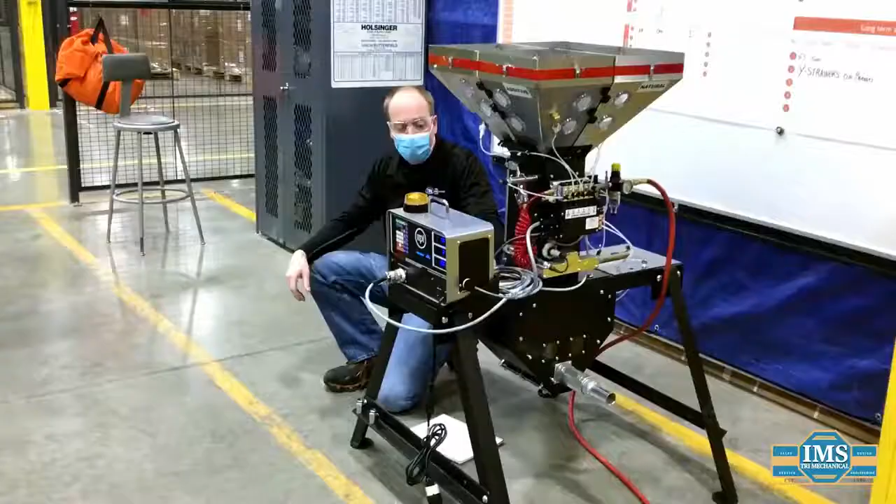Hi, my name's Rod J.R. Duff, and I am the Executive Director for Business Development for the IMS Tri-Mechanical Companies. I started as an inside sales rep in 1989 with the ambition to become a full-service plastics provider. Our company has a full design and engineering department, a full aftermarket services team, and a very energetic team of inside and outside sales professionals.

I am proud to say that each of these distinct and separate departments complement each other and are managed by some of the best individuals I have ever met. Hi, my name is Rob Williams, and I am one of the managers here at IMS Tri-Mechanical Companies. Hello, my name is Lawrence Gooding, Inside Sales Specialist for IMS Tri-Mechanical, with over 10 years of experience in the

plastics extrusion industry. My name's Barbara Rodardi, and I'm an account manager with IMS Tri-Mechanical. Hi, I'm Chuck Bueller, and I'm a regional sales manager for IMS Tri-Mechanical Companies. Hi, my name is Bob McHouston, and I'm the field and operations manager for IMS Tri-Mechanical. Today, I'm here to talk about Bausano extrusion systems and the upcoming Bausano Open Day event.

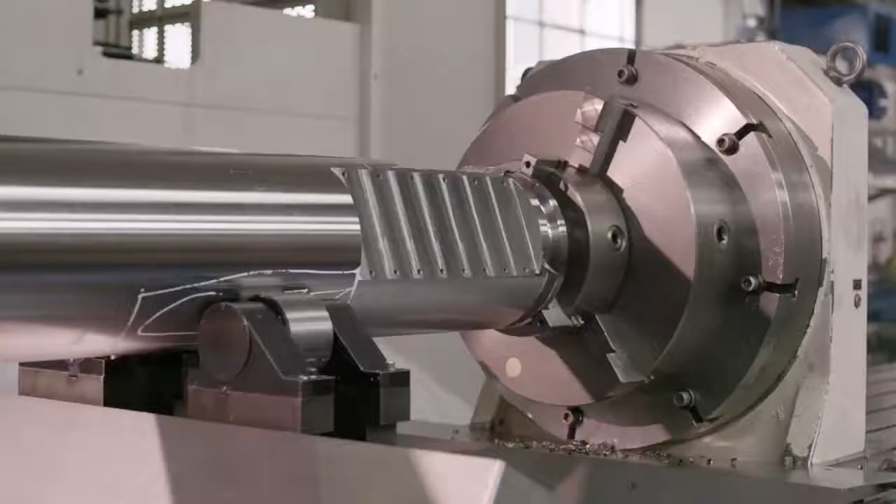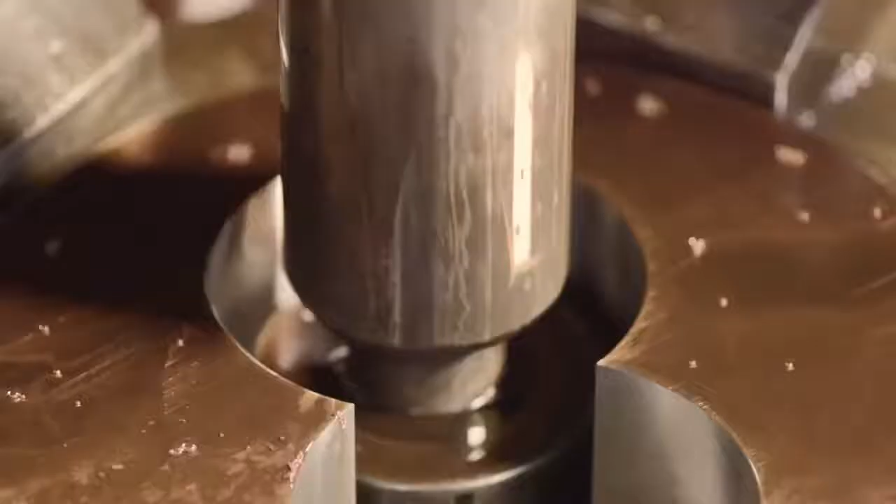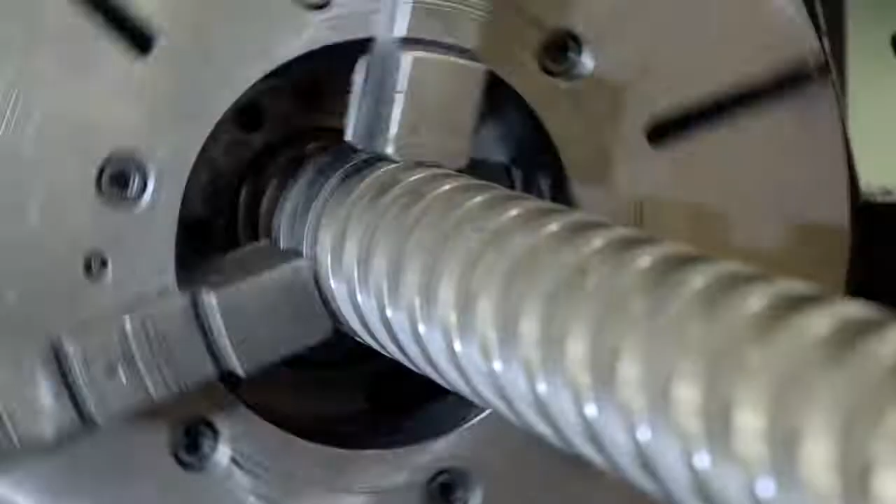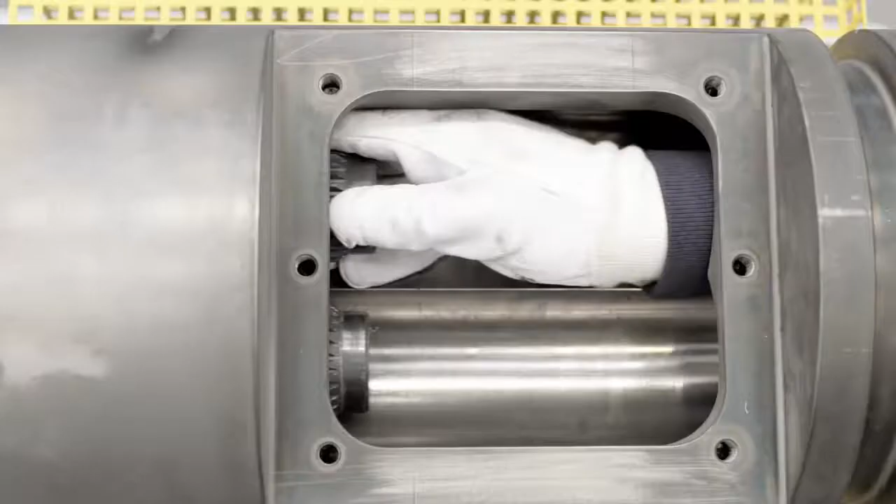Bausano is synonymous with innovation. This is why IMS Tri-Mechanical partners with them. We offer our customers the opportunity of transforming their companies into smart factories where productivity increases and working conditions improve. Unlike other extruder manufacturers, Bausano does everything in-house. I mean everything, from component drawing and manufacturing to line assembly. Every step is managed internally by their highly skilled staff.

Hi, we're here at one of the leading PVC compounders, certainly in North America. We just want to share their thoughts on Bausano extrusion systems. Hi, my name is Nick Lynch. I'm the president and CEO of Roscom Incorporated. So in the mid to late 80s, Roscom was looking for a twin screw manufacturer so we could buy equipment from. And we went to Italy and we met with Bausano Group.

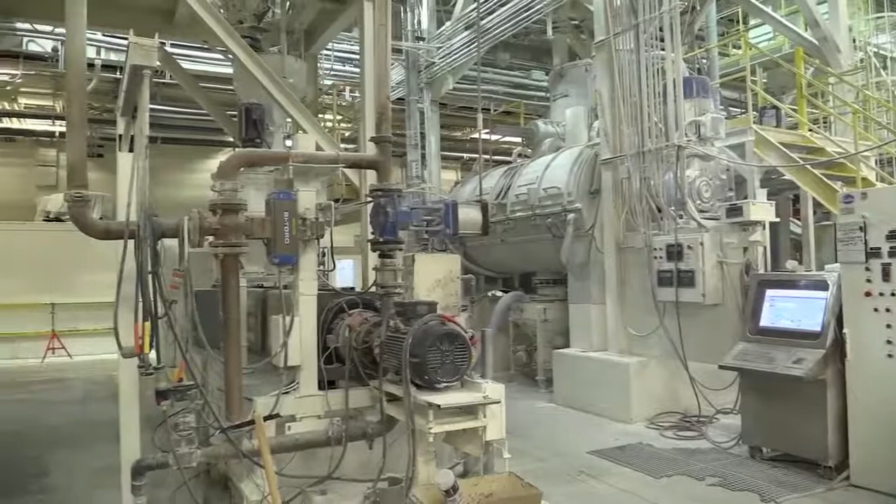Since then, we've produced over 1 billion pounds of material utilizing the Bausano extruders here at the Roscom facility. Our goal was to get to a machine that would run 1,500 pounds an hour. Bausano, with their 154 machine, has proven that we run 3,000 pounds an hour. So before we could actually buy a piece of equipment, we had to confirm that the material itself was going to work in our customers' locations.

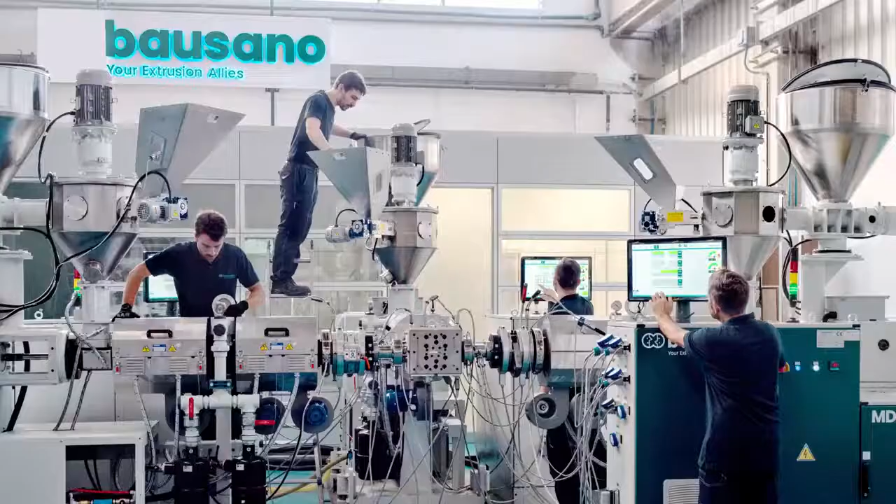Bausano had a testing laboratory, a full production testing laboratory. So they allowed us to ship material. We shipped it in a dry blend form, 20,000 pounds of 4 different materials. We wanted to verify that the material coming off of those production lines would meet the quality of our customers' products. And they did.

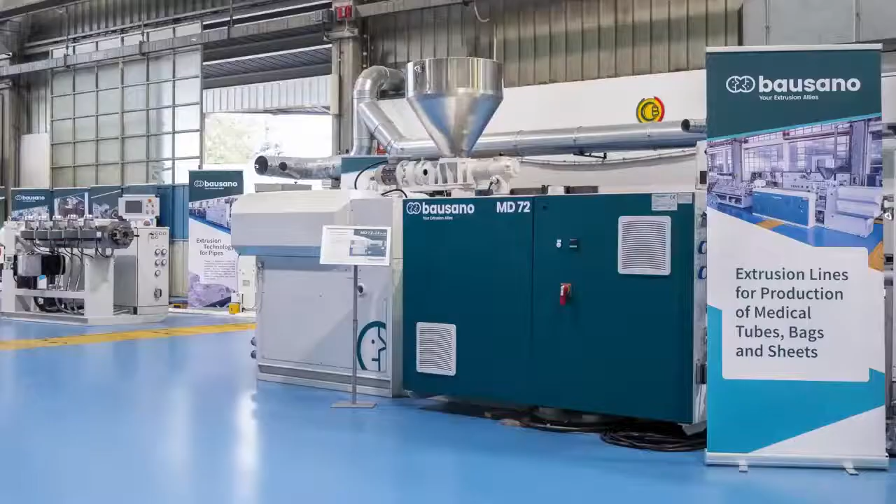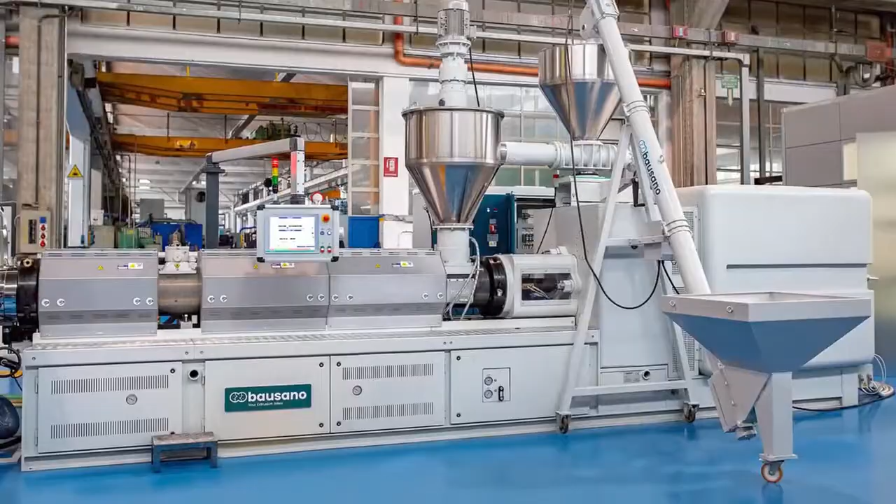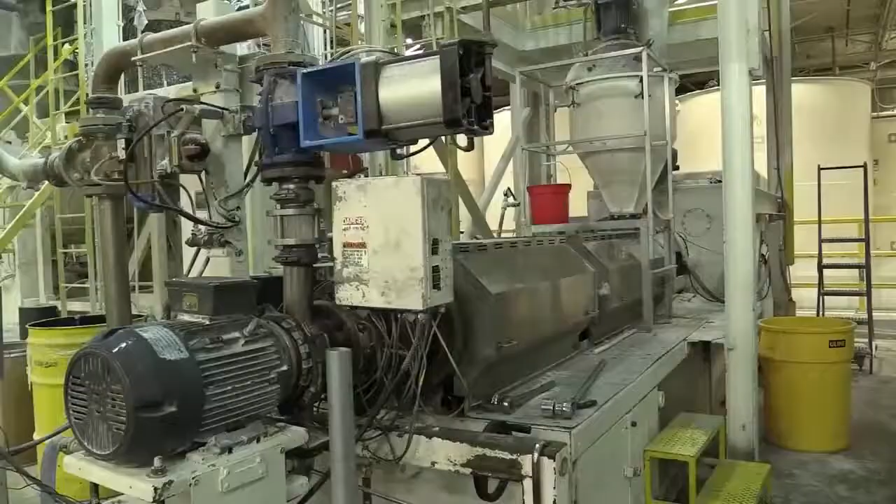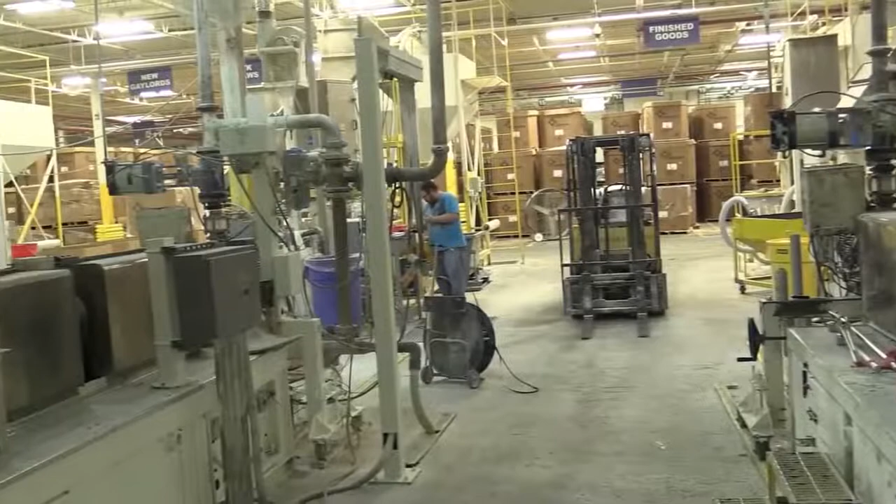I arrived at Roscom in 1996, and pretty much all but one of our 5 Bausano extruders were already in place here at that time. So we've been running them pretty steady since the day before I walked in the door. I actually love the Bausano. I mean, back in, I'm going to say 2001, I did the install of that line. That was the 5th one that we added. We beat the hell out of them. They're bulls. They run. We never really have an issue with them, which is great.

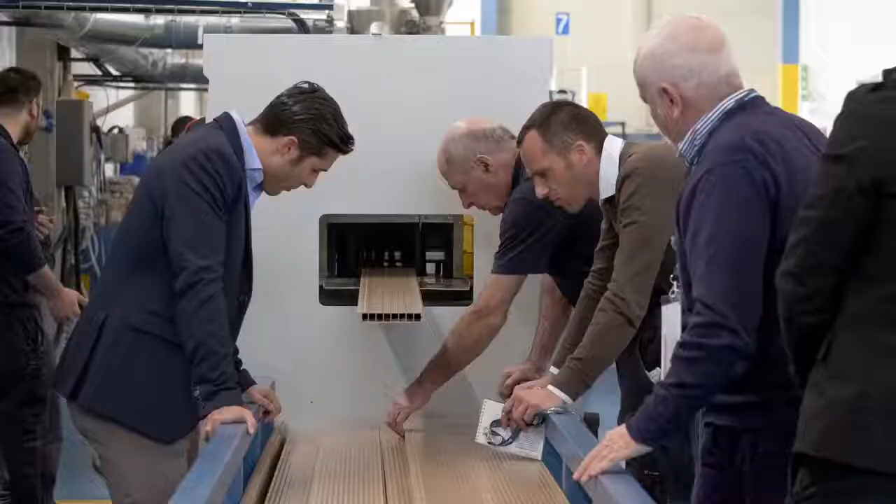As a manufacturer who runs 24 hours, 7 days a week, and we're always in somewhat of a sold-out position, the importance of having spare parts. Bausano, the fact that they manufacture these equipment every single day, so if we needed a transmission or we needed a gearbox, some companies here in the United States, you wait 6 to 9 months before they'll even have a product to ship you.

Bausano has been there for us right from the beginning. They have that type of inventory. Bausano's spare parts and everything, we've never really had a problem. We always go at them with an email and they're back to us in less than 24 hours worth of response. They've never dropped the ball on us at all. They've always been right there with us to work through anything, any questions.

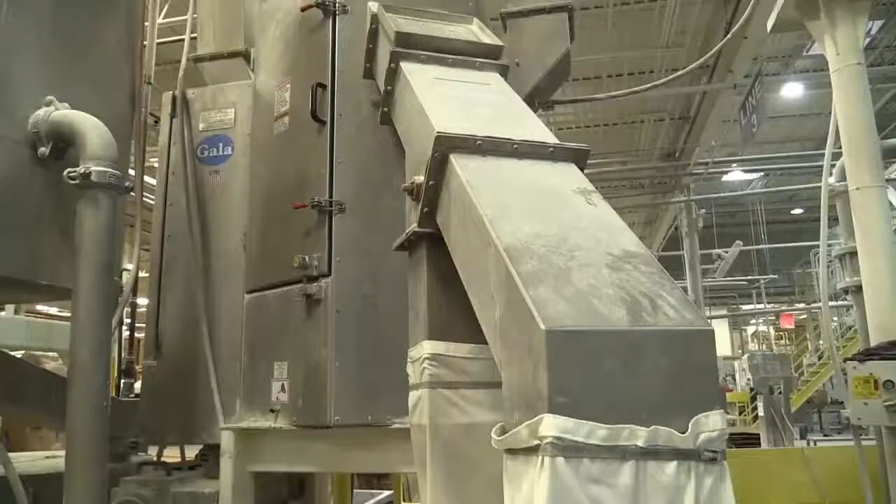Bausano itself, you can adapt various other equipment regardless of the manufacturers that we select that we want to work with. It ties in with the Bausano lines. When I talked about how clean and wonderful that plant was, and you look at all the orders and all the manufacturing, you knew Bausano was here to stay for the long run. And it's proven its point here 40 years later. They're a strong, wonderful company. They've done a great job for us.

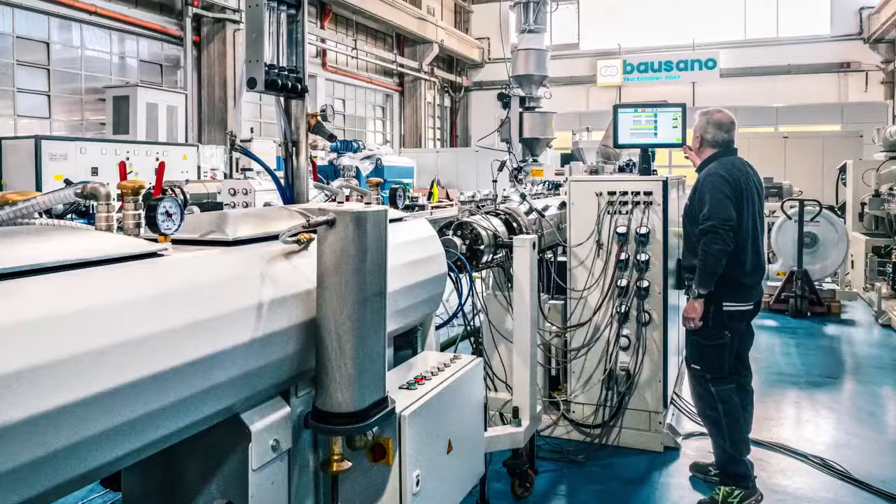I don't know of any other company that I personally have worked with, and I've worked with a lot of companies, I've designed a lot of plants, where the Bausano people and the equipment are state of the art. If I put another production line in from Roscom, I guarantee you it's a Bausano line.

You can go visit any manufacturer in the world, go visit them, go to the Bausano facility itself, and you make your own choices. And I guarantee you'll come back with the same feeling that I did, that you're working with a first-class world manufacturer of equipment. And that's, for me personally, seeing it and seeing other companies, you'll never regret it. It's worth the trip.

I'm not getting paid for this at all. I would never want any money. Bausano is a fantastic company, and I just wanted to spread that to anyone else that wants to listen. And I guarantee you, go visit everyone else, see Bausano, and you'll have them for life, just like Roscom.

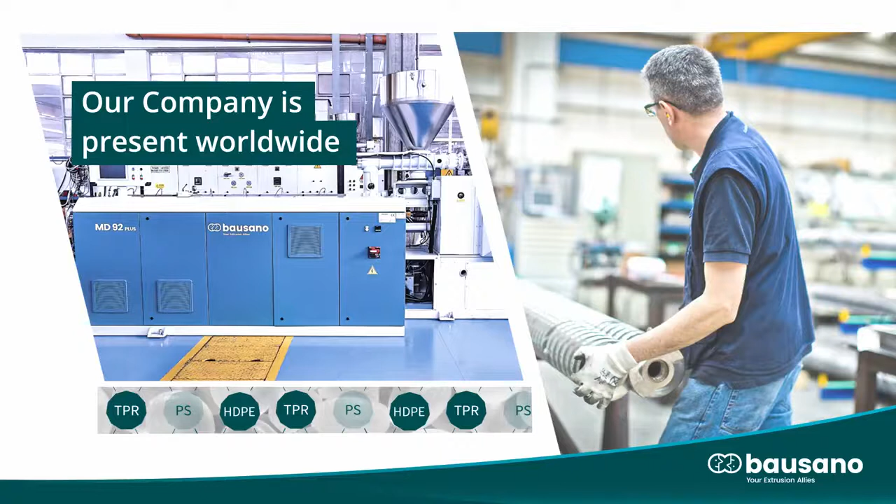So guys, today's event represents for us an important opportunity to provide a preview of the initiatives that we are implementing to effectively respond to the need of North American market. And let me tell you something. A structured training program for specialized technicians is underway at the Houston and Oswego partnerships aimed at guaranteeing qualified and prompt assistance centered around flexibility.

But not only. In autumn, at the showrooms of our partners, a twin screw extrusion line will be installed to be seen and tested by any interested customer.

Now I will hand over to Gianmarco to go into the details of the line that you will see in operations today. My name is Gianmarco Palladino, and as previously mentioned by Giorgio, I'm in charge of the southern part of US, from California up to Florida.

Today I will talk about our range of products. The core product is the twin screw counter-rotating extruder used for many different kinds of applications. For the production of pelletizing and repelletizing line for different material, but mostly PVC. For the production of pipes, such as conduit, pressure or sewer pipes, up to the medical and agricultural hoses.

In fact, over the past year, we have developed and improved a new generation of die head technology in order to provide a high-speed line where we can reach interesting output. Then, of course, we provide an extrusion line for the production of profile, such as windows, flooring, and ceiling, even those made in WPC, so wooden plastic composite.

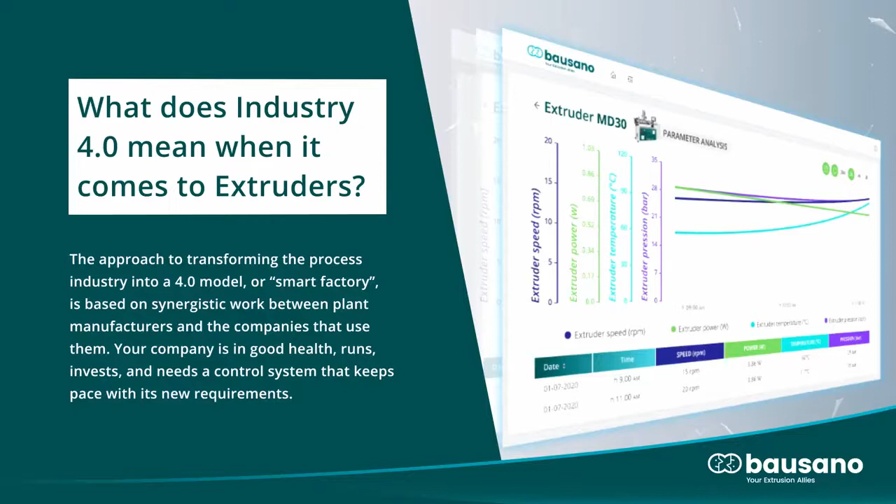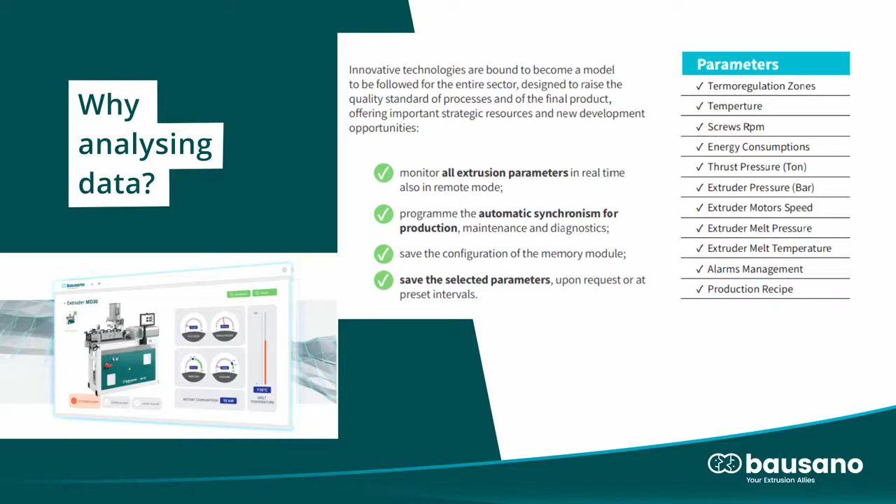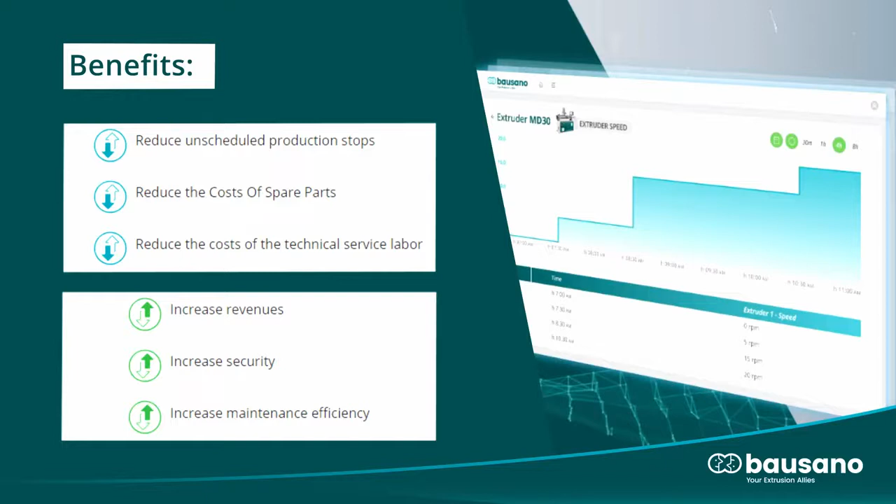Collect raw data and transform it into ready-to-use information, and have certified and correct data on which to set the analysis of business and R&D activities. This means that in the future, different machining in different places and production locations around the world can be incorporated in one single system.

So now I'll hand over to Giorgio, who will explain how our smart energy saving system works. Thank you, Gianmarco.

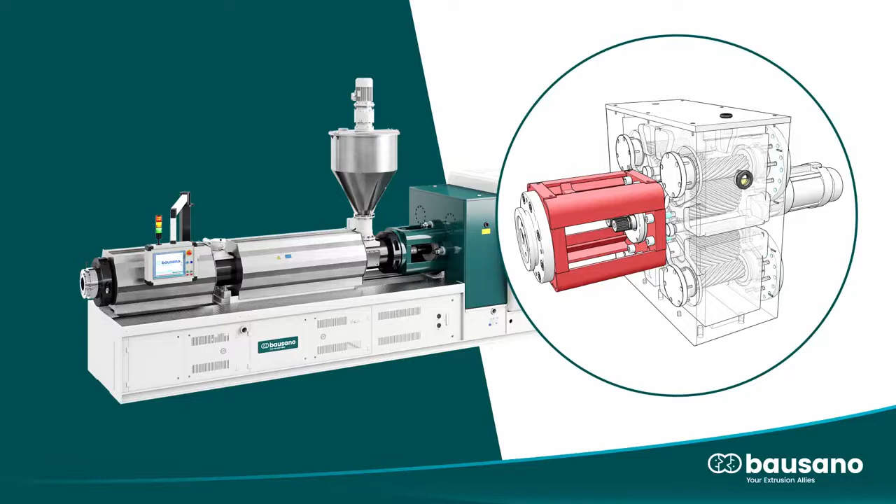Dear ladies and gentlemen, now finally we reach the heart of Bausano Technologies, the great hallmark of our twin-screw extruders, which was designed in the 80s and since then constantly perfected, is our multi-drive patent. The MD series twin-screw extruders are the only ones in the world equipped with this transmission system, which allows for the increase of the power and the resistance of the systems, as well as a reduction in energy consumption.

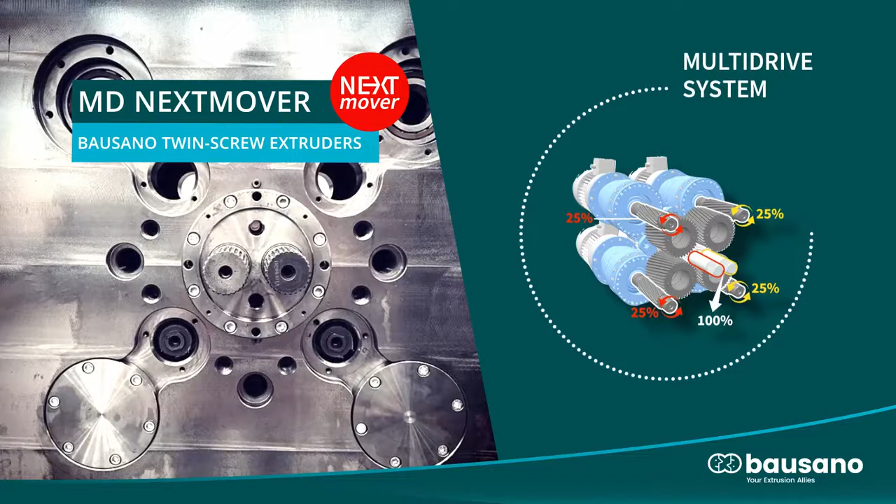Traditional transmission systems, due to their intrinsic nature, have obvious problems of strength and space as the installed power increases. The Bausano multi-drive system, on the other hand, allows the distribution of motion on 4 different points. It increases the life of the shafts and gearbox, increasing the general reliability of the extruder. The system, with 2 intermeshing counter-rotating screws, guarantees great durability and optimal performance for any type of extrusion line. Last but not least, the system makes it possible to reduce energy consumption with the same performance.

As previously mentioned, we are extremely sensitive to this point, precisely because energy cost today represents the 3rd cost item in the financial statement, and their containment is crucial to maintaining high competitiveness on the market, provided the functionality and efficiency of the sector's production process are in no way compromised.

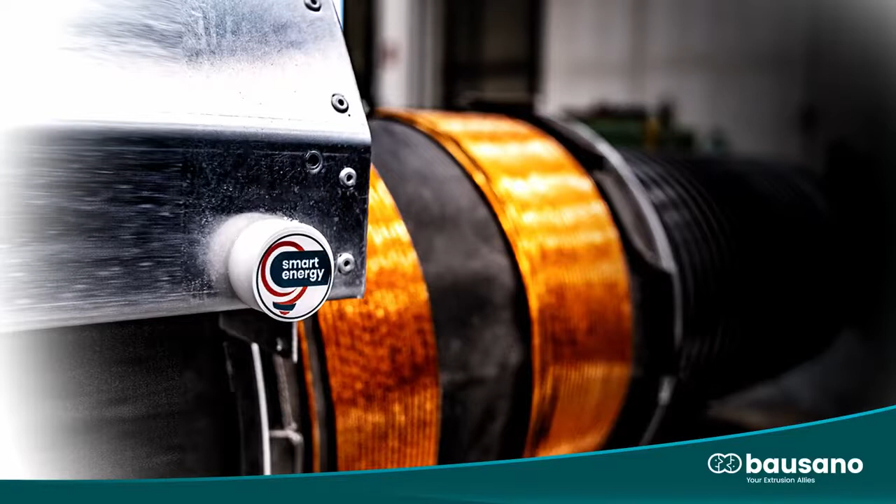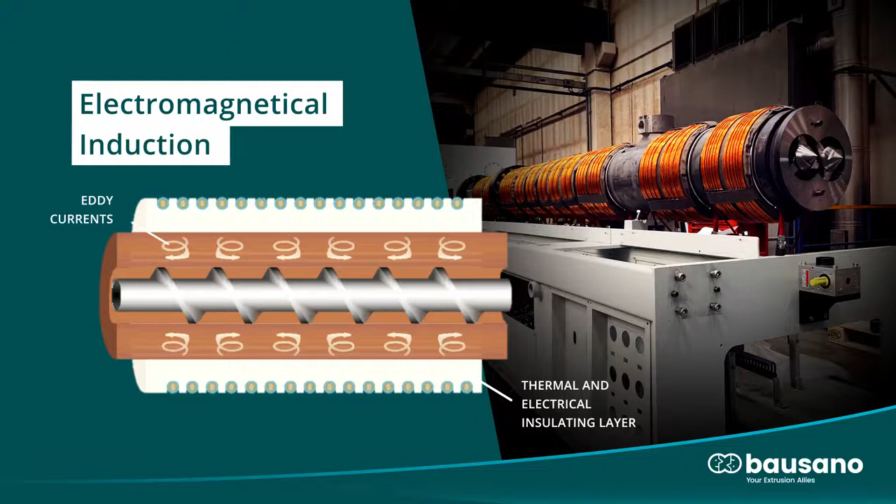The other great Bausano innovation is the smart energy system for induction heating of the barrel. This is a technological innovation that has never been proposed before in counter-rotating twin-screw extruders. In the induction heating process, as you can see from the slide, the metal of the barrel is exposed to an alternating electromagnetic field generated by a current-carrying coil.

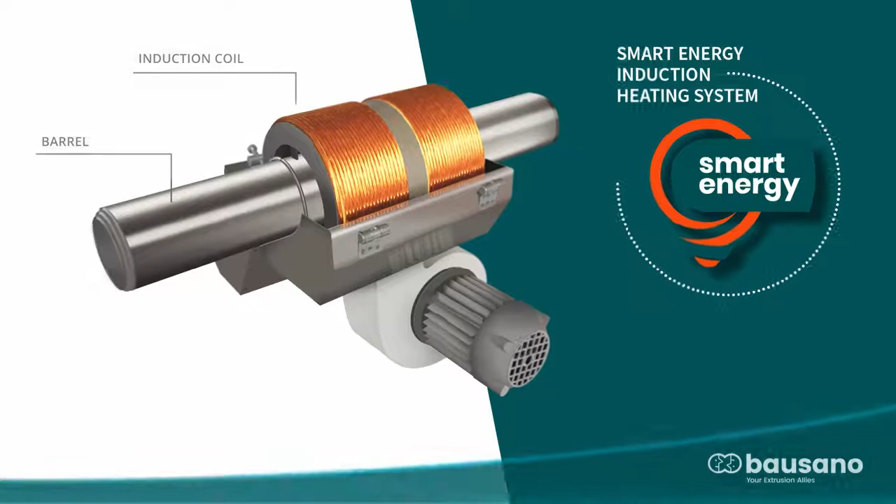This non-contact process produces eddy currents in the material, which in turn produce heat. The advantages of introducing the smart energy system can be summarized as follows: faster heating, maximum energy efficiency thanks to electromagnetic induction, which allows saving up to 35%. This is because the thermal energy generated by electromagnetism is not dispersed in the environment, but is concentrated inside the element to be heated, without the need for any physical contact with the element itself.

The other point is the machinability of the materials at higher temperatures. Now, if the colleagues of the test department are ready, we can get to the heart of the test, and we will see how our...

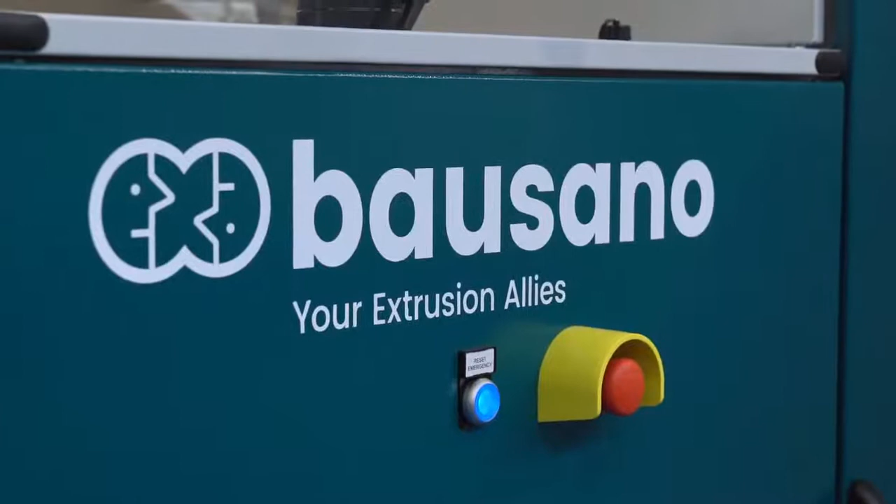MD125 Nextmover for the production of flexible PVC compound actually works. Alessandro, are you ready? Today we are in the Bausano test room and we will show you an extrusion granulation process with our MD125 configured in the Nextmover configuration.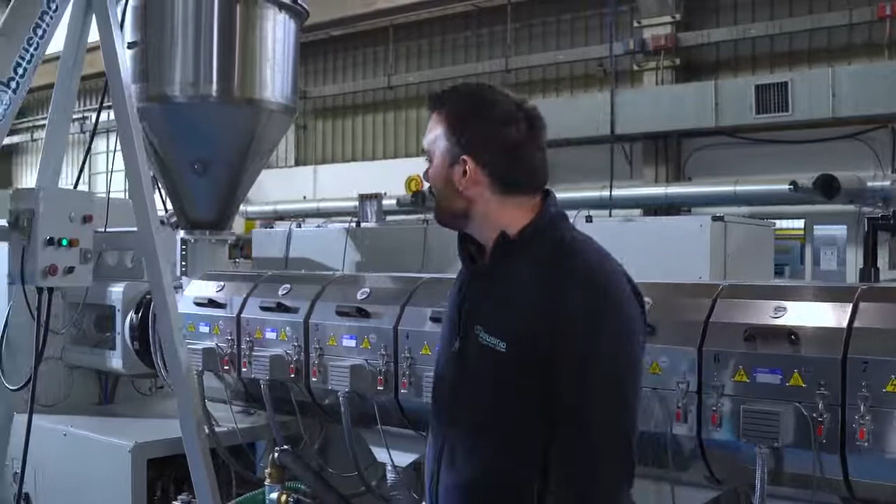It's a big pleasure to show you the work configuration of the line. We can start from the rear of the extruder, where we have 4 motors, 30 kilowatts each, all commanded by inverter directly linked to our main PLC. In the middle of the motors, we have a load cell that measures directly the thrust bearing pressure, which is displayed on our PLC.

Then we have the drive system, our multi-drive system already shown by my colleagues, all housed in our iron cast casing. After the drive system, we have the loading system of the extruder. We have a vertical conveyor moved by a 3 kilowatt motor commanded by inverter. From the vertical screw, the material is loaded directly on the feeding zone of the screws of the extruder.

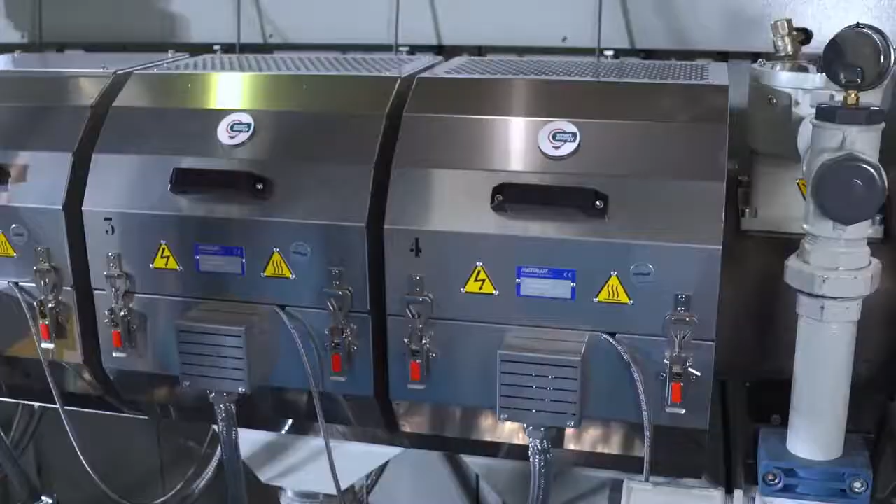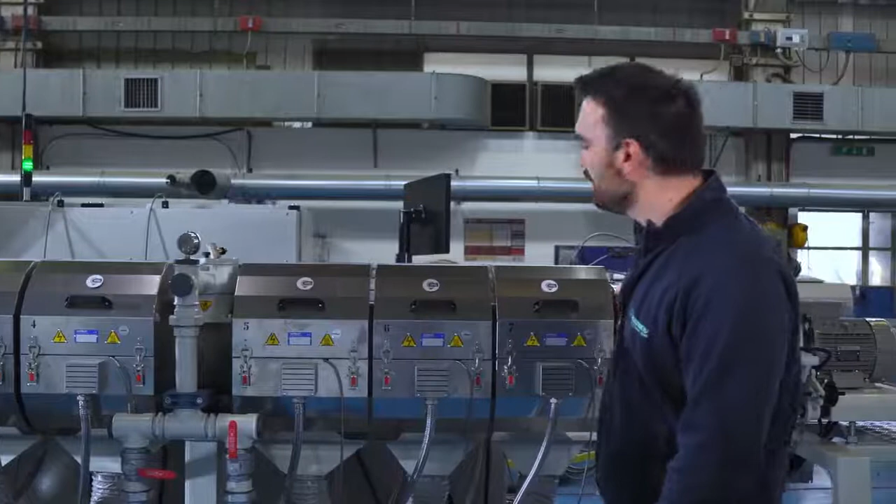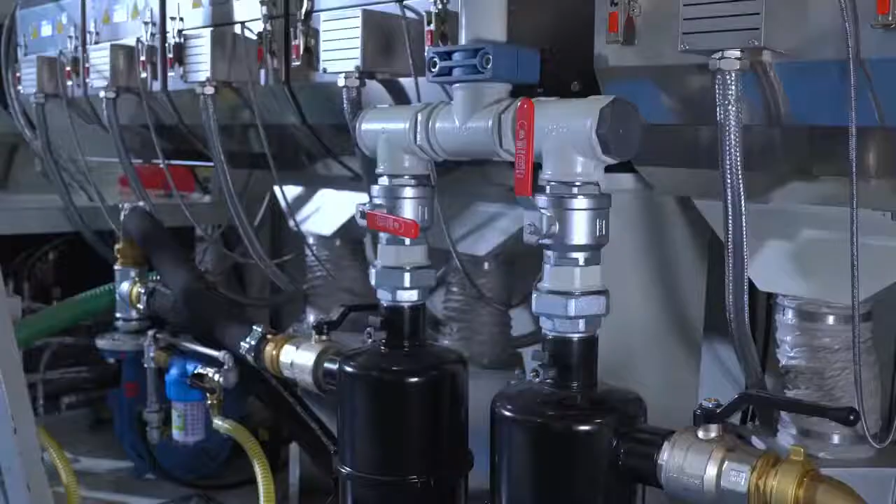At approximately 2/3 of the barrel, we have the degassing system, composed of the degassing window that is directly connected to 2 condensation barrels here, in which it's possible to clean and start again with the degassing process without stopping the extrusion process. This is the reason why we have 2 condensate barrels. The barrels are directly linked to a water ring pump of 4 kilowatts and 120 cubic meters per hour.

The barrel is cooled down by cooling fans. Inside the barrel, we have a couple of twin counter-rotating screws that are configured for the optimization of the process that we are showing you now.

There is the compounding of flexible PVC. The screws are internally cooled by silicone oil in order to optimize the cooling of the screws.

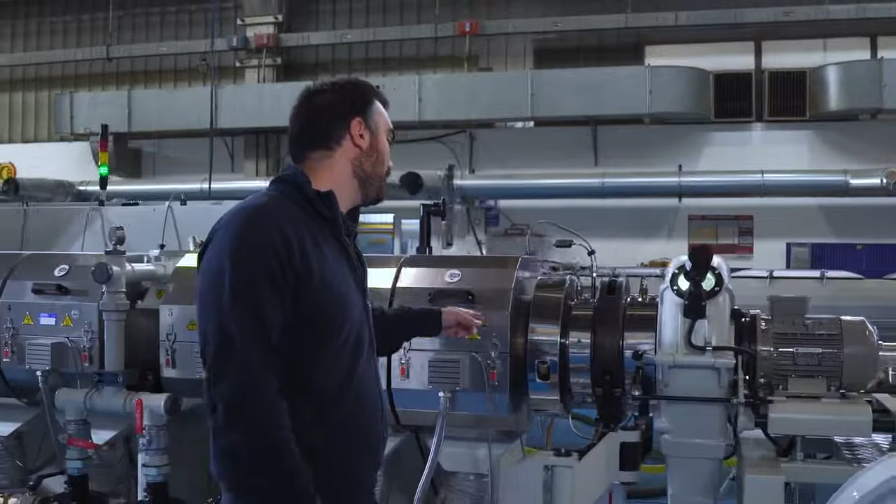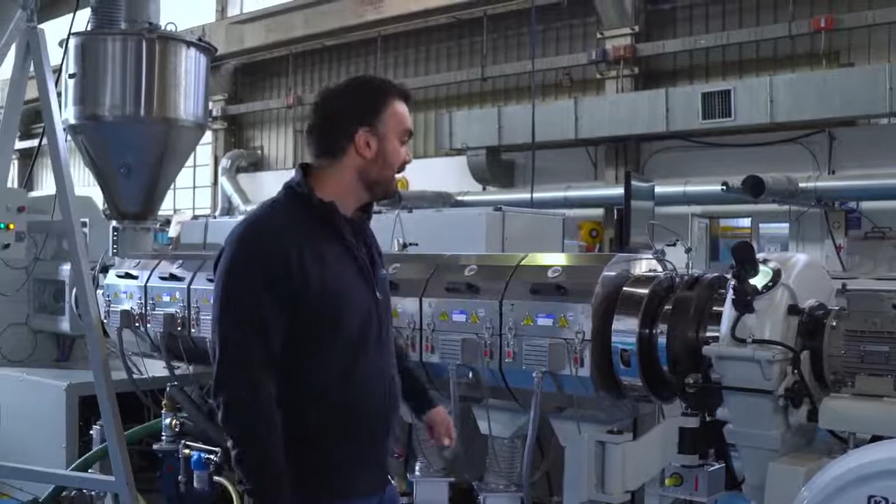Here I show you the die of the granulator. The die is heated by 3 heaters of 2.5 and 3 kilowatts of installed power. There is a manual lifting system with a triple clamp that easily allows the blockage of the die on the edge of the barrel.

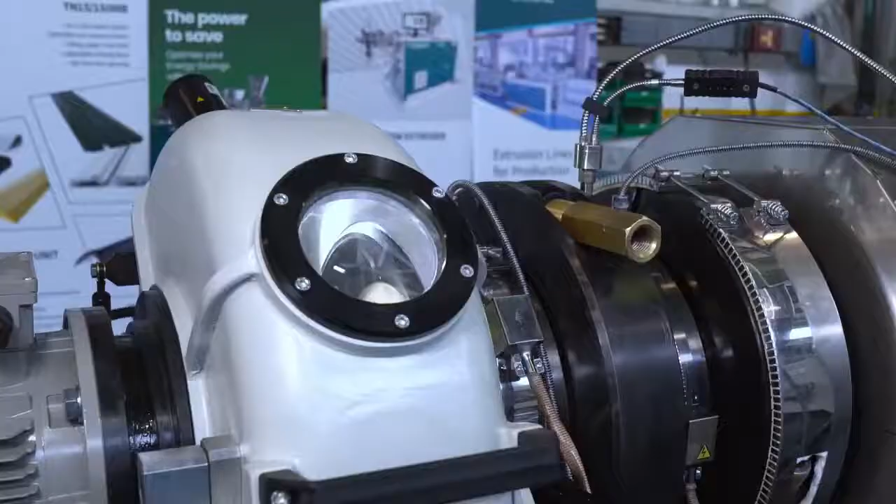The granulator die is composed of 4 rows of holes with a diameter of 3 millimeters each. At the rear of the granulator die, we have an ogive that allows optimization of the distribution of the material coming from the tips of the screw and going inside the holes of the die.

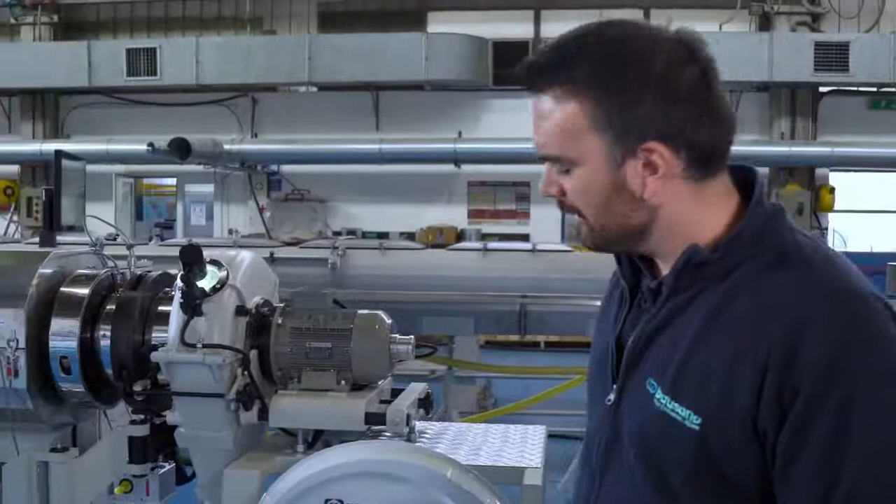Then here we have the cutting system. All the cutting system is installed on a couple of rails that allows easy assembling and disassembling of the die and the cutter. The cutter is composed of 3 blades assembled on a floating head that allows uniform pressure on the die and a uniform granule dimension.

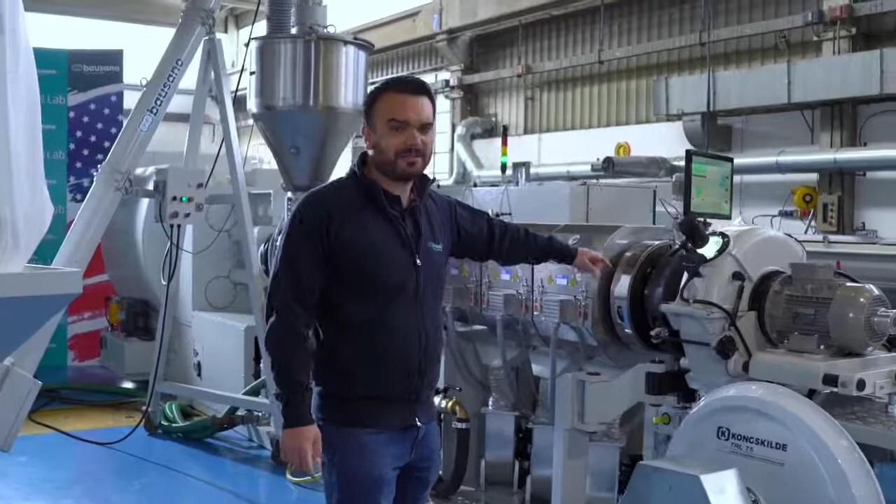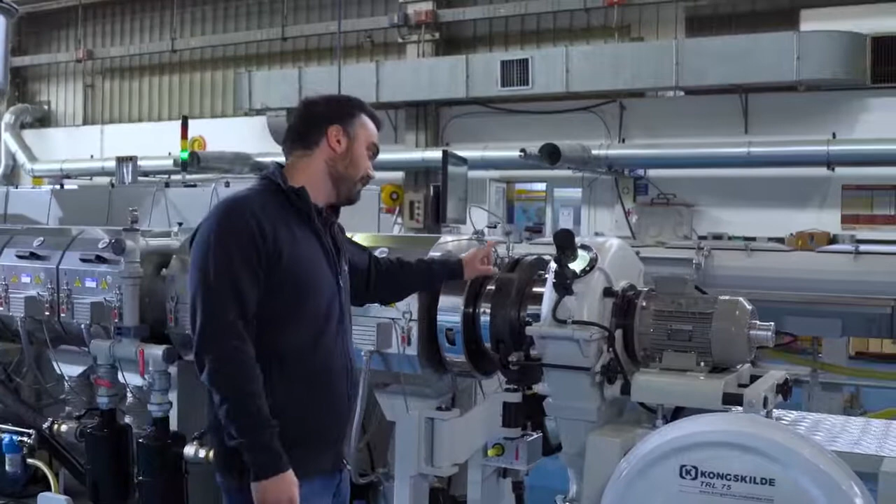The cover of the cutter allows optimization of the internal cooling air circulation. The granules fall down and are launched up to the cyclone of the cooler through this launcher of the granules, which is moved by a 4 kilowatt motor.

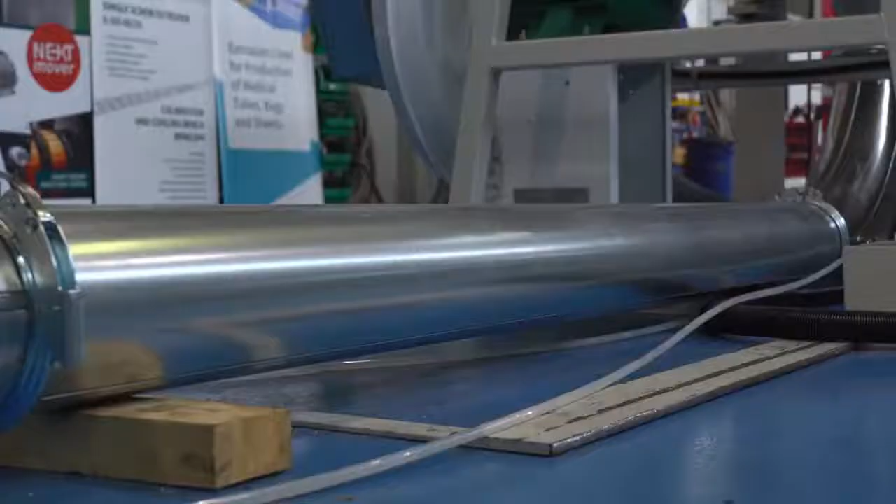The granules are launched inside this pipe, which is jacketed with water circulation inside in order to optimize the cooling of the granules that are launched up to the cyclone.

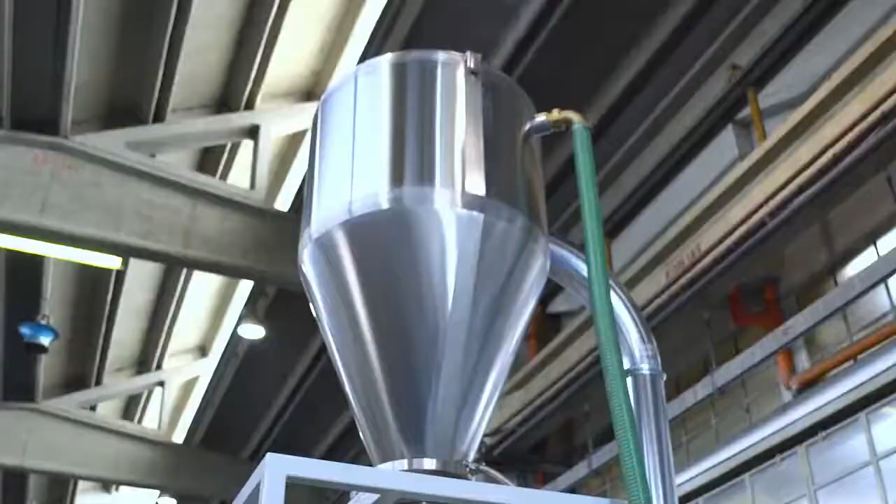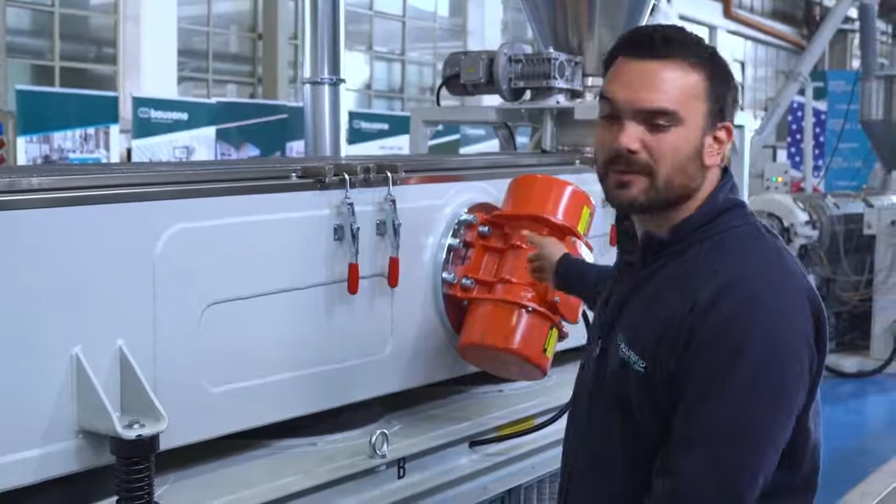On the bottom of the cyclone we have a filter. Then the granules are directly taken onto the vibrating tray of the cooler. The vibrating tray is hollow and has cooling air, whose speed can be easily adjusted on the small panel by inverter.

The granules fall down on the cooler exit. Here we have a system of different trays with different holes in order to make a selection of granules according to the granule size.

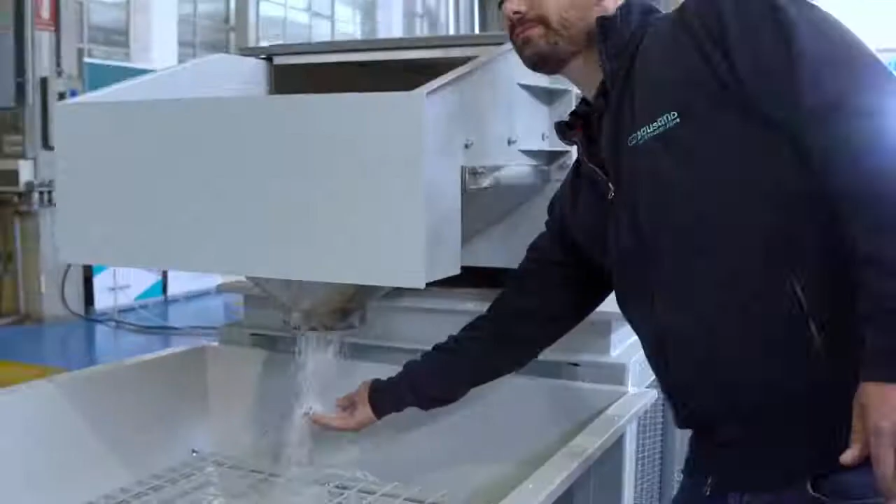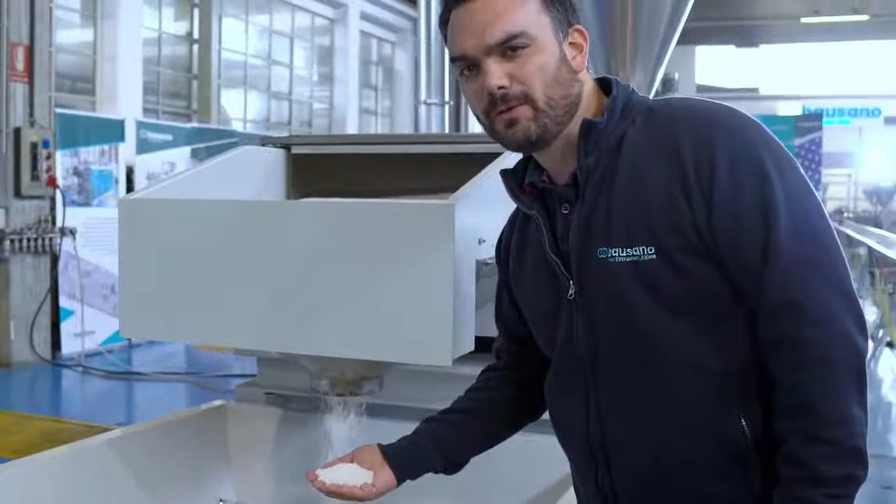As you can see, the granules that we are producing now are very good quality with very good gelation degree.

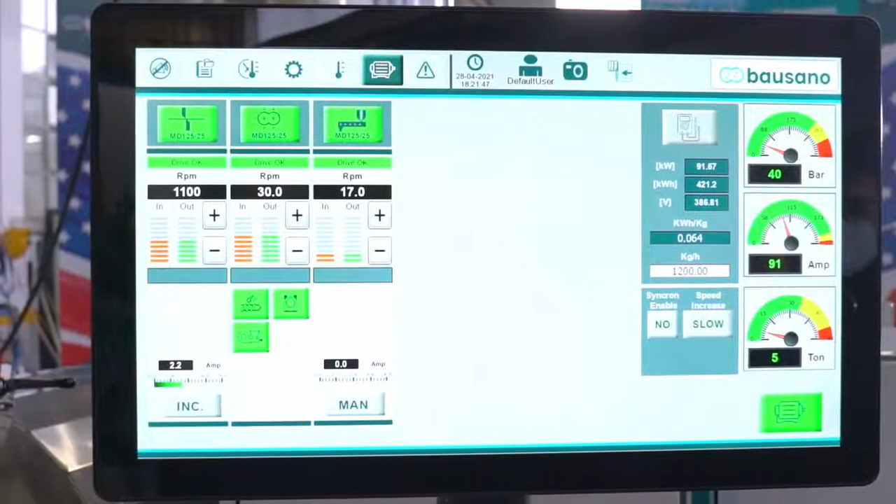The main feature of this control is that it's all made with Industry 4.0 in order to allow monitoring of all the extrusion process parameters in terms of temperatures, extrusion speeds, amperage, and also all the energetic consumption in real time of the line remotely, maybe by PC, tablet, or smartphone.

On the main page, the motor page, we have all the motor speed and the wall amperage, the pressure on the thrust bearing, and the speed of the extruder screws and of the doser conveyor, also with the torque on the doser. They can all be set and monitored on this main page.

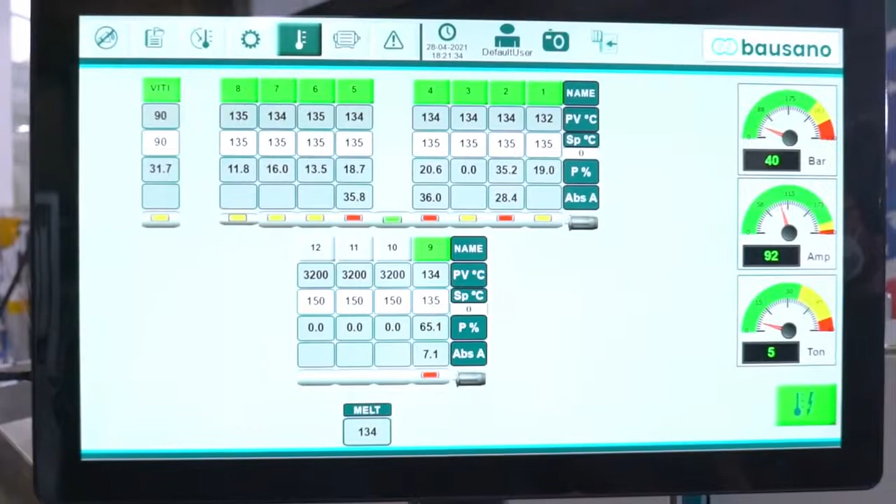The second page is the temperature page, in which we have displayed all the set temperature of the barrel, the set temperature of the die, the real temperature of the barrel and die measured in real time by thermocouples, the melt temperature, and the pressure of the melt inside the die, directly measured through our temperature and pressure sensor inside the collector of the die.

Then we can switch to the maintenance page, in which we have both active alarms and the maintenance program indication that comes out every time some action is needed for programmed maintenance of the extruder.

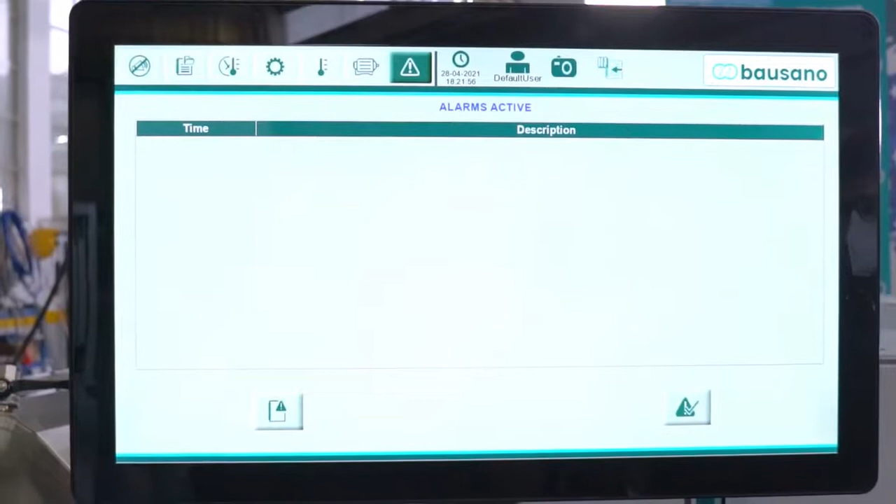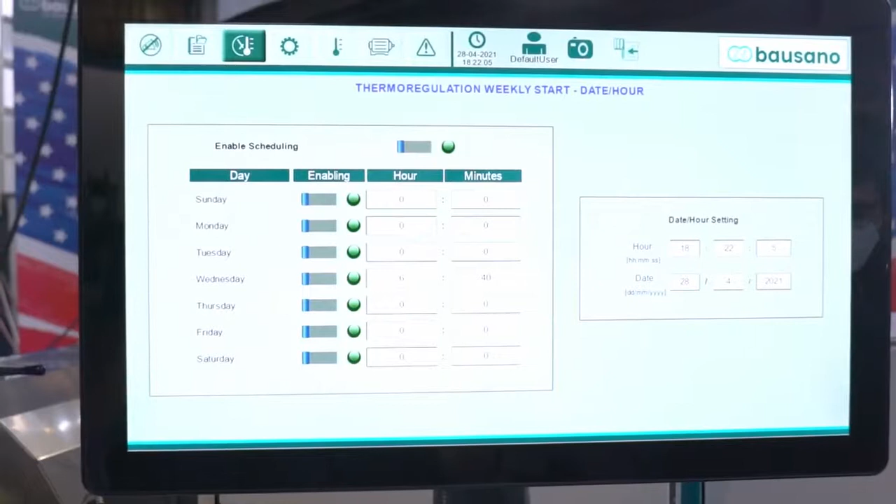Then we can switch also to the programming page, in which it's possible to schedule the switch on of heaters at a certain programmed time in order to optimize the preheating times of the extruder.